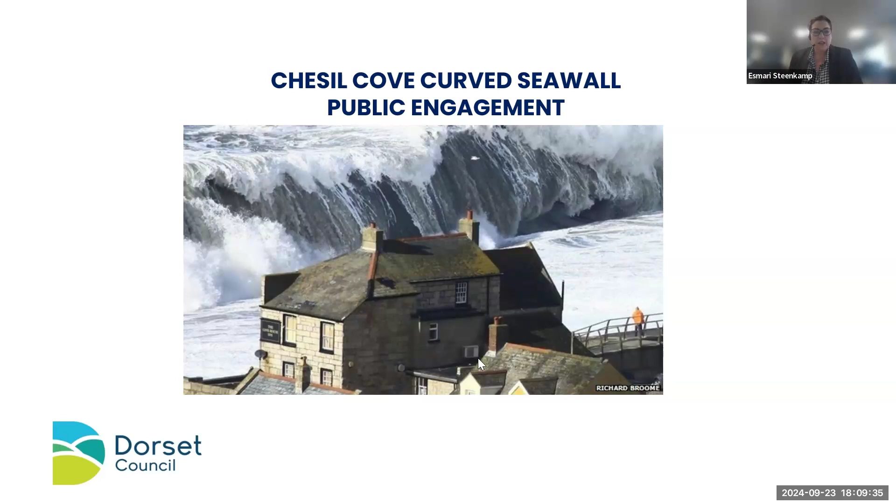Good evening. I'm the Coastal Risk Manager for Dorset Council. So as such, I head up the team of engineers who are responsible for the coastal defence and harbours infrastructure of the council. I just wanted to introduce you a little bit to the team and give some background for the project. So I'm the manager of the coastal risk team.

Ian Fitz, who is a project engineer in my team, has been tasked with this project. Now I give him support and steer on this project. Then we have Jacobs, who is our consultant on the project, and they bring their specialist knowledge to it. And Ross Fitzgerald is here tonight with us to discuss more of the technical detail.

So there are members of the core project team here tonight, but I just need to note that there are almost a dozen other people that work behind the scenes and are involved in the project, and they are mostly from scientific, environmental, planning and engineering backgrounds, and they all contribute to this project from their perspective, specialist fields and knowledge. So Ross is going to get into the meat and bones of the project after this, but I just wanted to give some context to everybody here tonight on where this project is and where it is coming from. So Nikki, if you can just give the next slide, thank you.

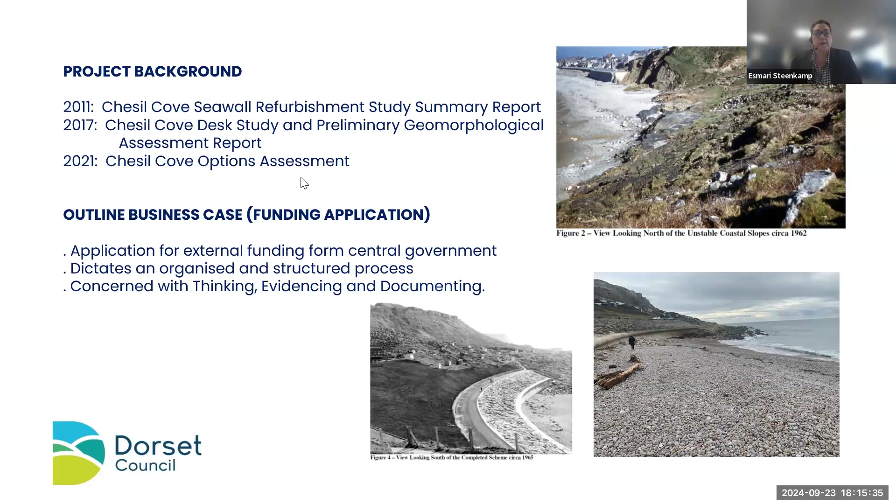and statutory consultees. The project, therefore, as it stands here tonight, is in a conceptual stage whereby we propose an engineering solution, and that solution must then pass a number of considerations of environmental, planning and engineering nature. Nikki, the next slide, please.

So I just wanted to give a bit of a strategic context to the project. There is the National Shoreline Management Plan, and for this section of the coast, it is a hold the line policy. So that enables us to actively intervene when it is necessary. We're also busy with the flood and coastal erosion risk management strategy that covers Portland, Underhill to Wyke Regis, of which this location forms part. And then we've got the West Dorset and Weymouth and Portland local plan of 2015.

Now, there is a specific key strategic objective in that plan that I would like to highlight to the audience here. And it reads, protect and enhance the outstanding natural and built environment, including its landscape, biodiversity and geodiversity, and the local distinctiveness of places within the area. This will be the overriding objective in those areas of the plan which are particularly sensitive to change. And this is, in my view, very applicable to this location and this project that we are busy with.

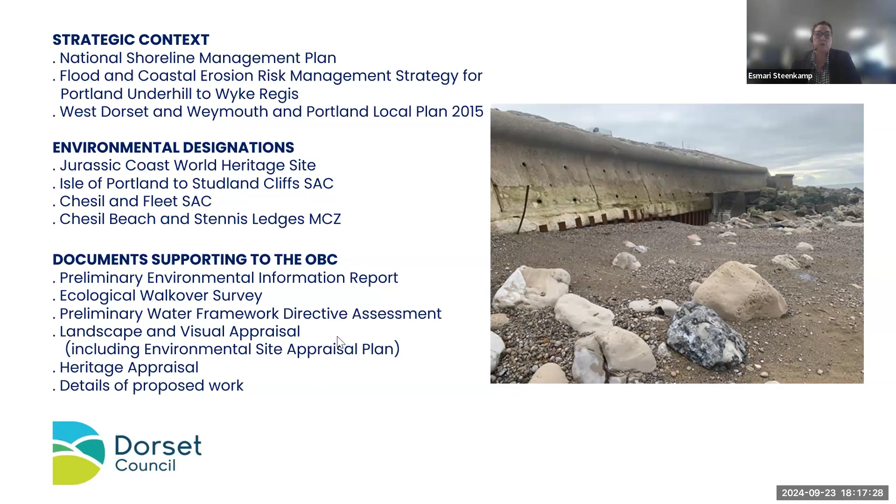There's a number of environmental designations at that location, and that gives rise to key areas of concern that need to be addressed. Therefore, with our business case that is submitted, there will also be supporting documentation that will address these key areas for consideration, and those documents are noted there in the presentation. So that's your preliminary environmental information report, ecological walkover survey, preliminary water framework directive assessment, landscape and visual appraisal, including the environmental site appraisal plan, heritage appraisal, and then details of the proposed work. So Nikki, if you can just get me the last slide, please.

So the project going forward, we are hoping to finalize this document by the end of this year, after which it has to be reviewed by the cabinet and approved, because the cabinet has to put forward funds towards the project. After that, we will submit it to the EA for approval, which will then unlock the funding that we wish to unlock for this project. Then planning and detailed design will follow in June 2025, and hopefully construction in the autumn or winter 26-27.

I think it's just important to note at this stage as well that the planning and design stage will come with its own rounds of engagements. There are many licences and approvals that need to be obtained before we can go do anything. And that includes also a public engagement process under which we will put the designs forward to the public for input. And this project, like any other development in Dorset, will go through the regular planning application process of the council. So that is where we are at the minute. And I will hand over to Ross now to give you the technical information of the project. Thank you very much, everybody.

Thanks, Esmari, and thank you everyone for having me along. And hello, let me just share my screen now. Bear with me one moment. This one here.

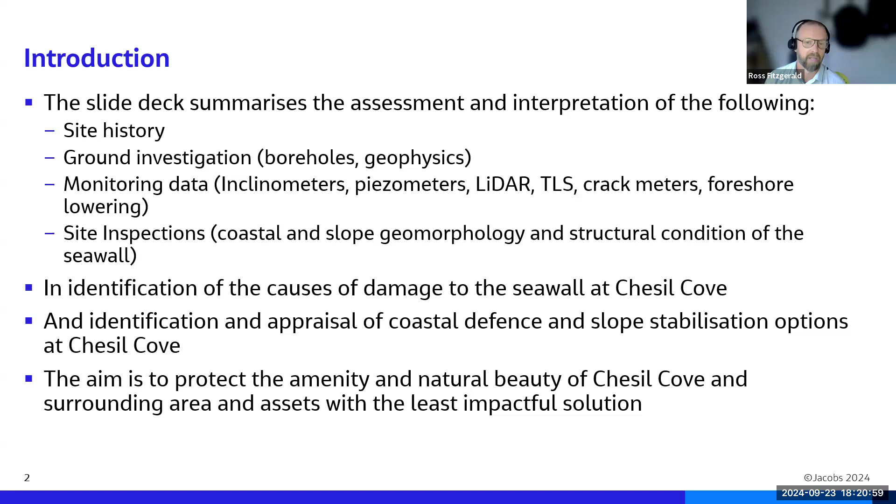We're also going to look at coastal defence and slope stabilisation options at Chesil Cove for the future. And I think, as Esme said, the aim is to protect the natural beauty and the amenity of the site and impact things as little as possible.

Over the next 100 years, this debris was gradually eroded back to the coastline by about the late 1950s. And at this point, coastal erosion started again of the actual slope itself. And this kick-started a lot of debris slides and mudslides and things. And that's the reason why the seawall was put in the first place.

So the cause of the 1857 slide was loss of toe weight. So as the coast erodes, you lose the force that resists the landslide because the weight at the back of the slope starts winning. So although the seawall isn't designed to stabilize the slope, it's a coastal defense structure, it's vitally important in preventing deep-seated landslides and shallow landslides. So this is a natural and cyclic process that goes on.

Okay, next is just a few of Stuart Morris's photos from around the time of the seawall construction. So thank you to Stuart for providing these. The one at the top and the one at the bottom left show the slope. So here we can see mudslides and compression ridges and tension cracks in the slope before the seawall was put in place, which illustrates the point I was just making.

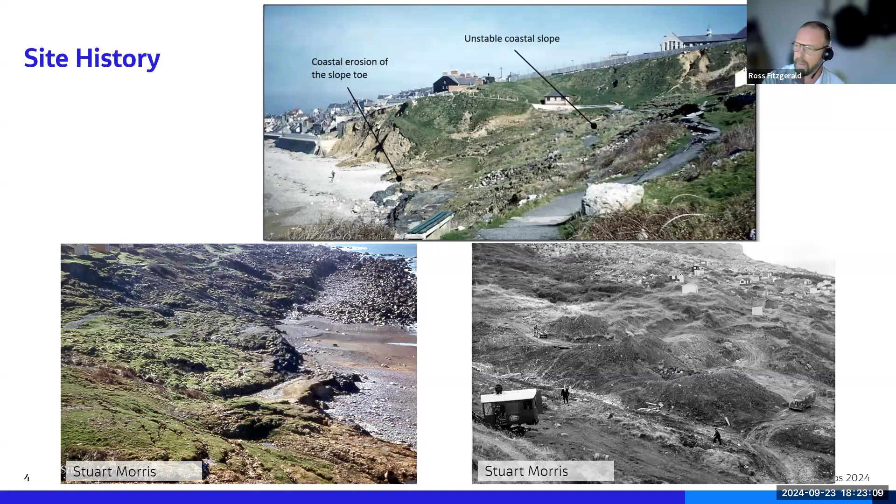And the more of this material that is lost to coastal erosion, the more you destabilize the wider landslide system that goes all the way up to the headscarp, which is the top of those mining dumps, sort of piles of rock. The bottom right image, we can see a haul road and a digger at work when the seawall was being constructed.

But what happens when the beach is offshore? The clay underneath gets worn away. And as the clay gets worn away, the seawall, which wasn't designed to have the clay being worn away, loses support because the seawall's foundations are in this clay.

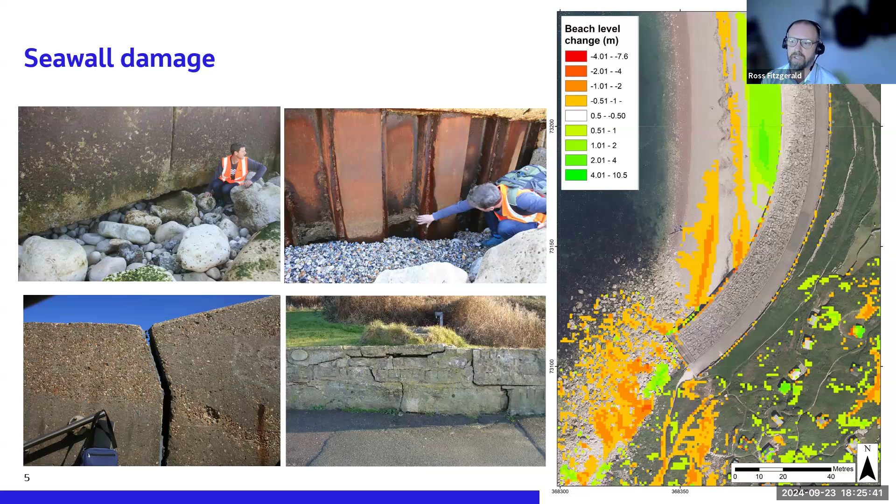So the seawall is still robust, but it just needs a bit of help to see out the next 100 years, and that's a big point. So when we do these sorts of projects, we have to consider the next 100 years. So bear that in mind as we go forwards.

So last one here, I'm just going to get the pointer. Has that worked? No, it hasn't. Laser pointer. Here we go.

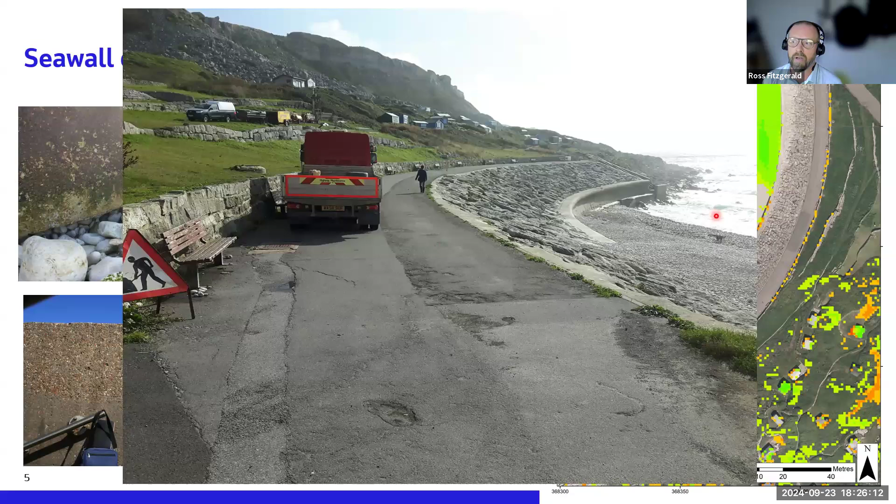So if you follow the rim of the rock apron here, which has been repaired a couple of times, you'll see that the promenade undulates. And the reason that it is settling is because material has been lost from below here, probably out from under the seawall through the piles. And that could be a really big problem because you're being eroded from behind, essentially.

Okay. Next, this is the augmentation works at the southern end of the seawall. There's no foundations, but it was sat on the clay. Basically, this is all completely eroded away now. And I know Ian's been measuring this in recent years. We've actually stopped measuring it because there's nothing to measure anymore. There's no clay left there at all. So this is a problem, and it has left the stairs and things, what we term the augmentation works, actually hanging off of the structure, which isn't good.

Okay, so next, this slide makes the point that, although the seawall was excellently designed and built, we weren't able to predict in the 60s that the coast was going to erode and leave the southern end of the seawall proud of the alignment of the beach, so sort of unprotected. So this is really the problem area here, where we're seeing that the structure is slowly falling forwards, not falling, that's over-egging it, sort of slowly rotating forward because of this loss of support here.

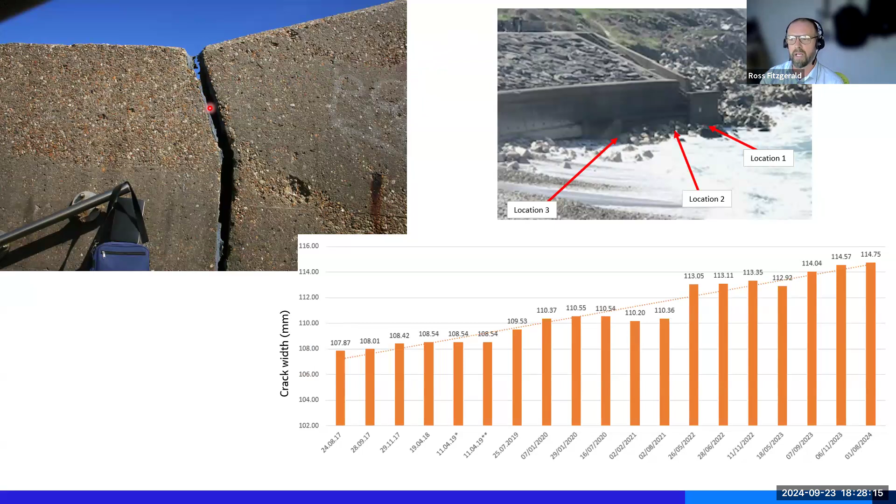It was originally thought, and the reason I was involved, because I deal with landslides a lot, was that there was a landslide behind it that was pushing it over, but this isn't actually the case. So those cracks I showed you on this wing wall here, if the earth pressure was coming from upslope, these wouldn't open up, they'd be compressed together. So it's actually the fact that the front of the seawall, the seaward facing bit, is losing support, that it's slowly falling over.

Okay, so my structural colleagues did a structural report on the seawall, and essentially, in layman's terms, because that's how I need to view it, because I'm not a structural engineer, the southern end here is slowly rotating forward because of loss of support. The northern end, all of the master joints between the wave return walls, so these are the big chunky bits of concrete along the front, they're actually in compression because the shallow failures are pushing into it. So essentially there's torsion being applied to the seawall.

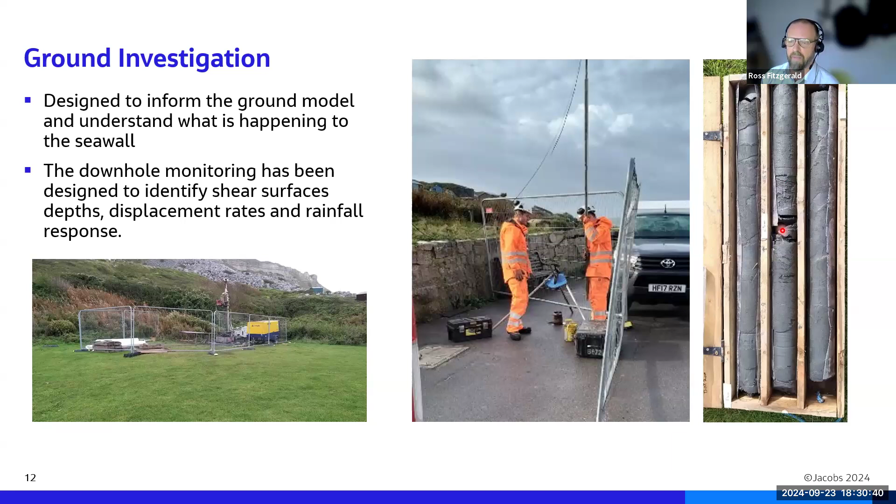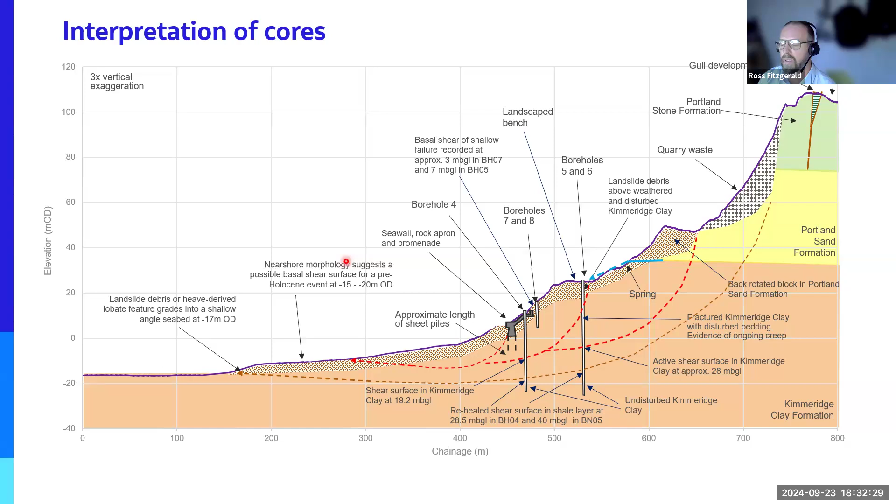There's another dotted line here at depth that we found, and that is probably from an earlier ancient landslide when sea levels were lower, and that's nothing to worry about at all. Oh, none of them are anything to worry about, as long as we keep the seawall in place.

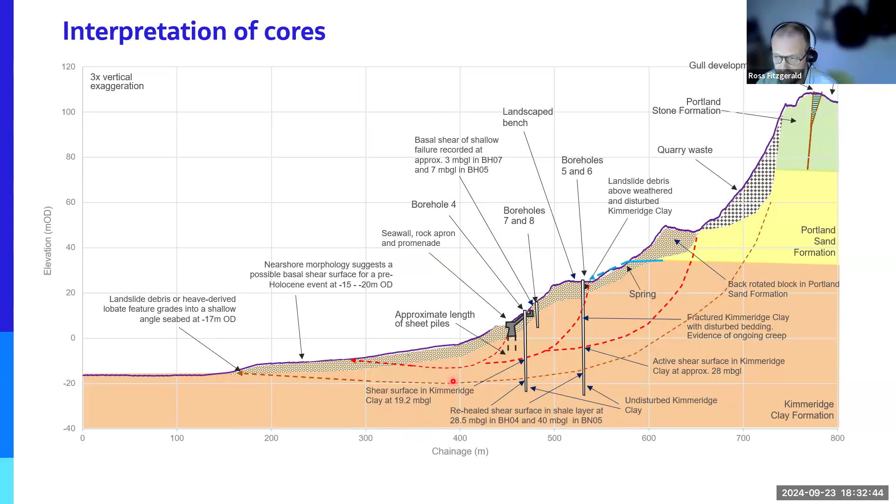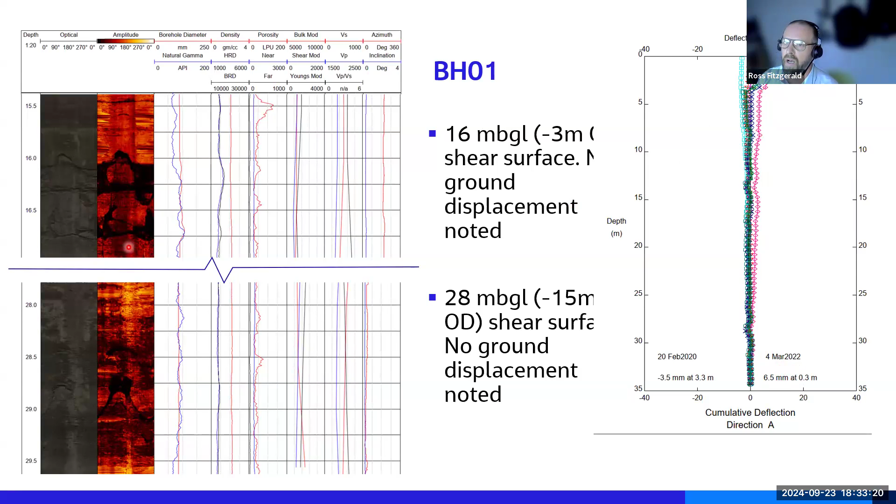So lots of things here, but I've just shown some pictures of some of the geophysics which look down the hole and find these disturbed areas where the ground is moving. And this is a shallow one in borehole one. So this is in the seawall. This shows that over just over 2 years, the seawall has moved just over a centimetre at the southern end towards the sea, which isn't alarming, but it's obviously not great. And it's at the depth where we're seeing the shear in the ground, and also at the depth we're seeing it in the cores. So these lines of evidence stack up to prove the ground model.

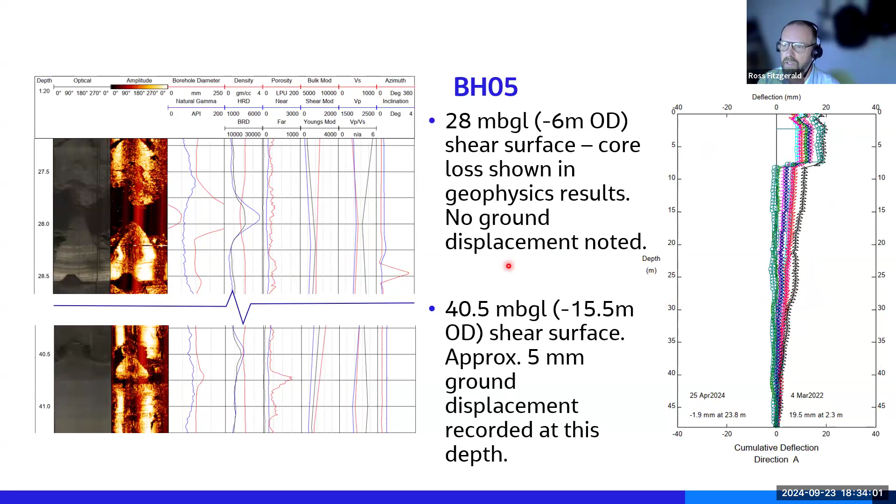We don't want to lose any of the coast to encourage this to happen. And again, it's backed up in the logs and things. I won't labour through all of that. This is a summary, schematic summary of the direction and rate of movement.

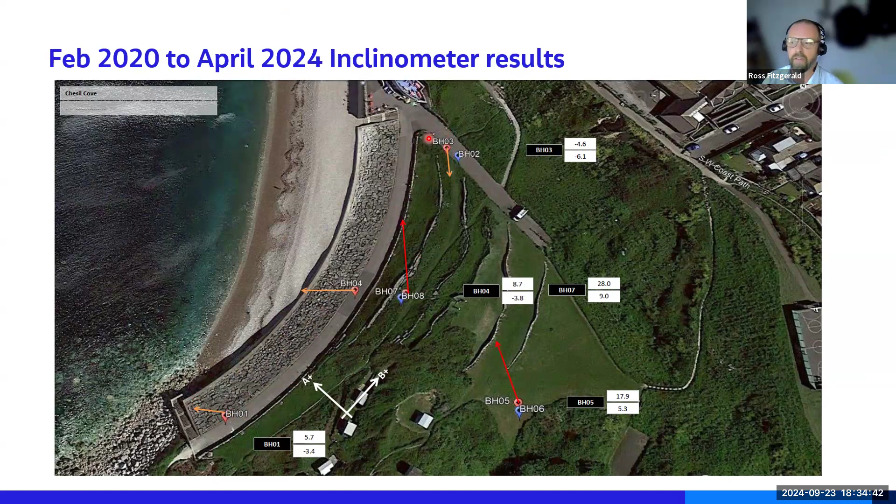And it really backs up the structural report in the fact that there is earth pressure being directed into and behind the seawall. And the seawall itself, the southern half, is moving forwards towards the sea, which we definitely don't want. And this end, although we don't have a borehole in the actual seawall, that doesn't seem to be happening. So there's this kind of twist happening to the seawall. And again, all of the lines of evidence stack up. They all make sense in context of one another.

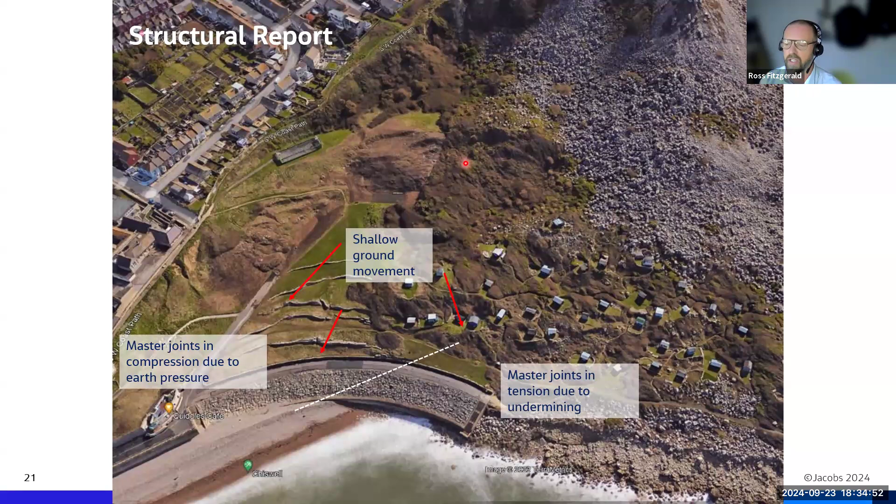I think I've had this one already, haven't I? So this is just explaining the different forces on the seawall at each end. This is the shallow earth pressure. So here you've got 3 to 4 meters of shallow movement, and this is what's causing the damage at the rear of the seawall.

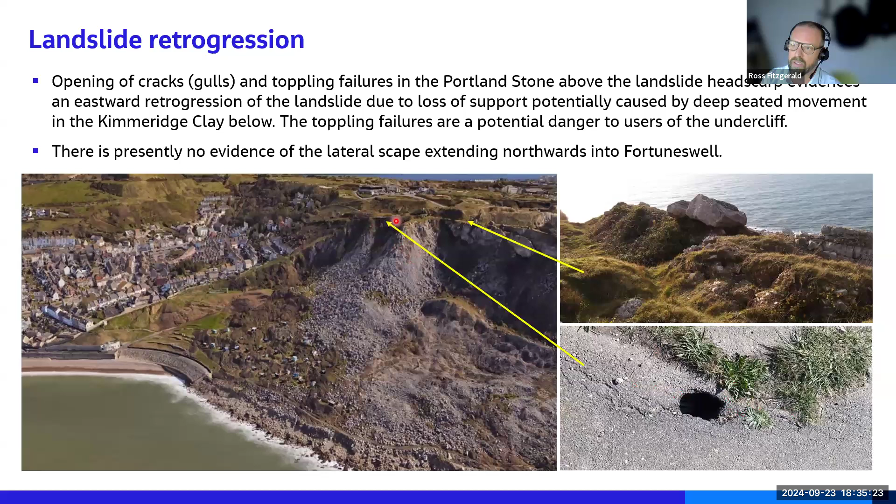Right, the next thing, and again, not being alarmist at this, but this is potentially what could happen. So what we noticed a few years ago is that you were getting cracks opening up and gulls opening up behind, in between the crest of the slope and the road. That's developed, so there's now quite extensive tension cracking and quite big voids opening up and things.

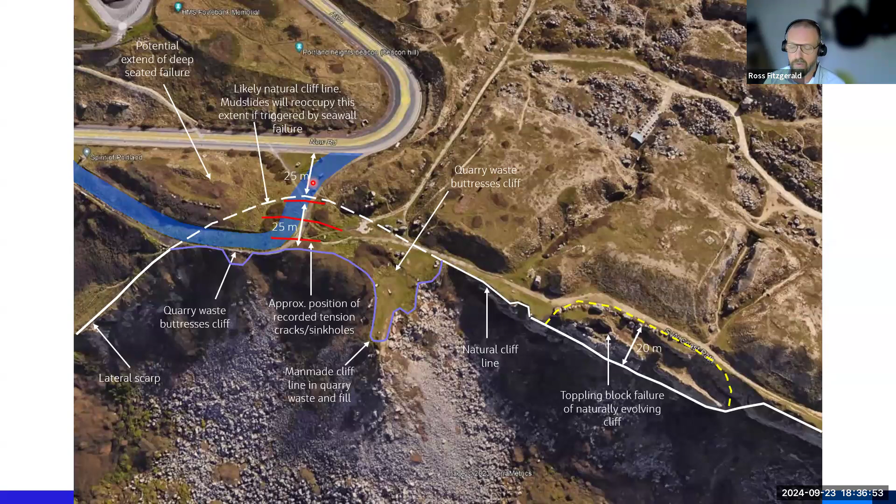And bear in mind, we're looking at 100 years. We have to base what we're doing, our business case, on 100 years. This 50 meters total to where the road is, it isn't looking so healthy. So really we are reliant on the seawall to protect access. Again, I don't want to be alarmist. This sort of thing isn't going to unravel quickly, but we have to consider the 100 years.

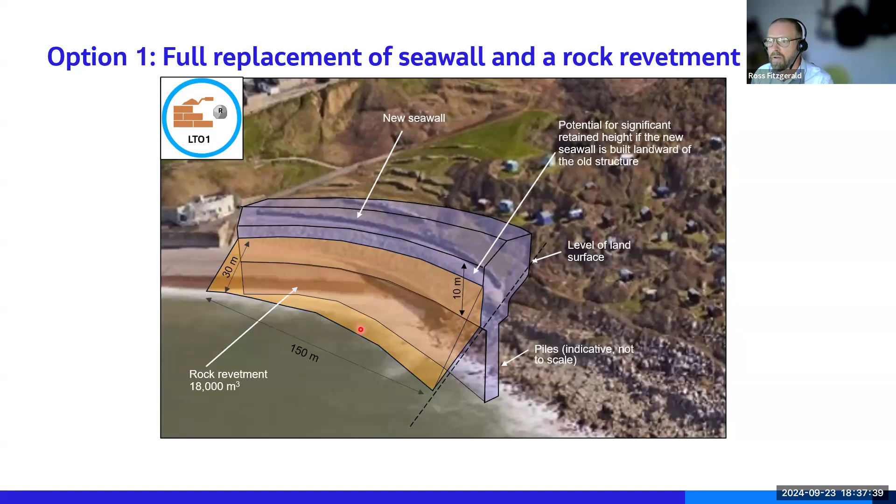It would have massive implications and disruption. It also triggers all sorts of environmental and heritage problems. So it's really, really not an avenue we want to go down. There's a partial replacement, which essentially has all the same problems.

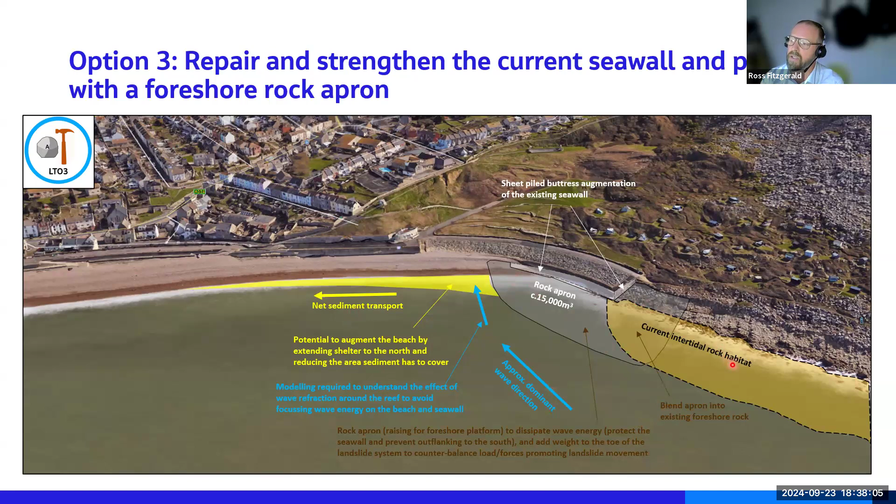It's really very disruptive. We then have a series of options where we propose to repair the seawall and then protect it with some rock, so we get a long life out of it, far longer than the original design life. So we've got a rock apron option, which kind of blends into the natural rock habitat. We've got a terminal groin and reef option.

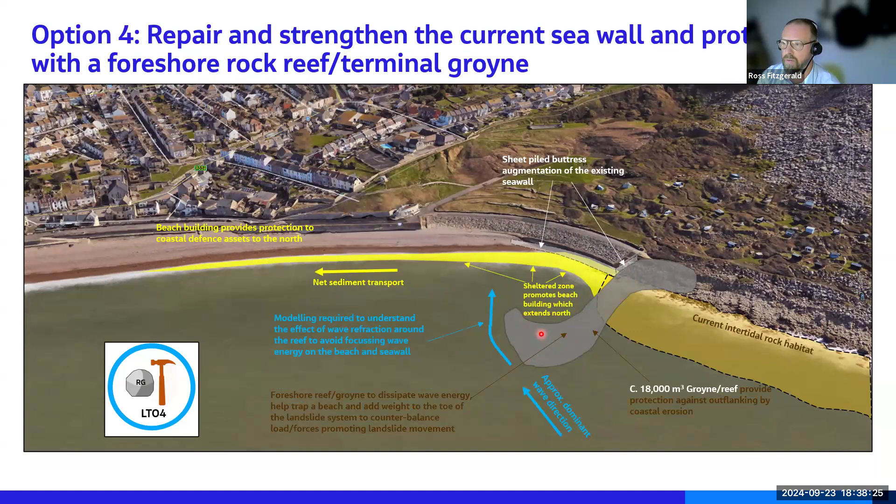The problem with this is that the water's so deep here that you need an enormous amount of rock. So it's very expensive, and it triggers, working in the nearshore here, all sorts of environmental problems. So that wasn't favoured. We've got a rock revetment and a repair. So this is the kind of thing that's on the table. This is where the business case has gone. Something a lot more modest, but well designed to protect the coast.

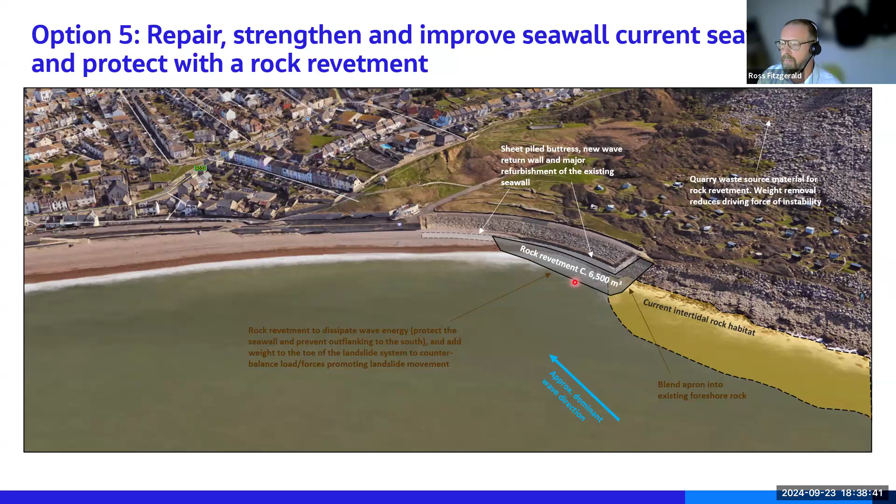You've got an offshore reef option. This is similar to the terminal groyne and reef. It triggers all sorts of problems environmentally and with cost. And we've gone through, as Esme said, a process of assessing all of these, the pros and cons of all of these. And here's a list of just some of the things.

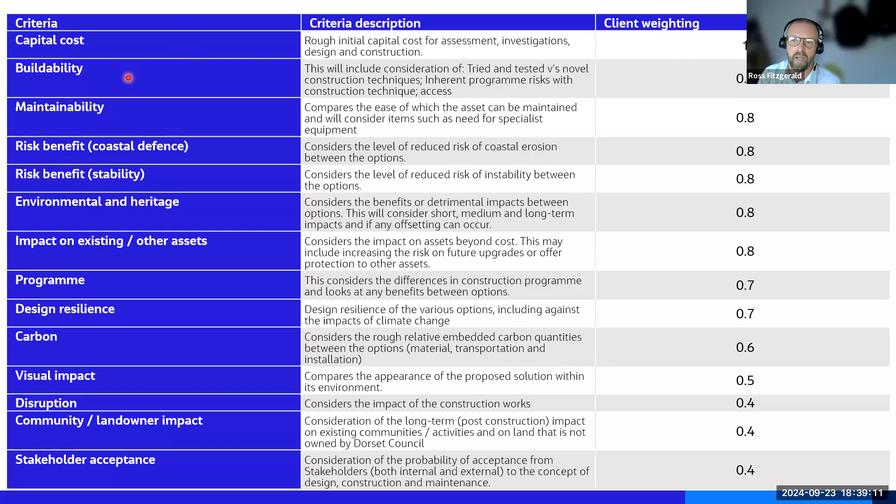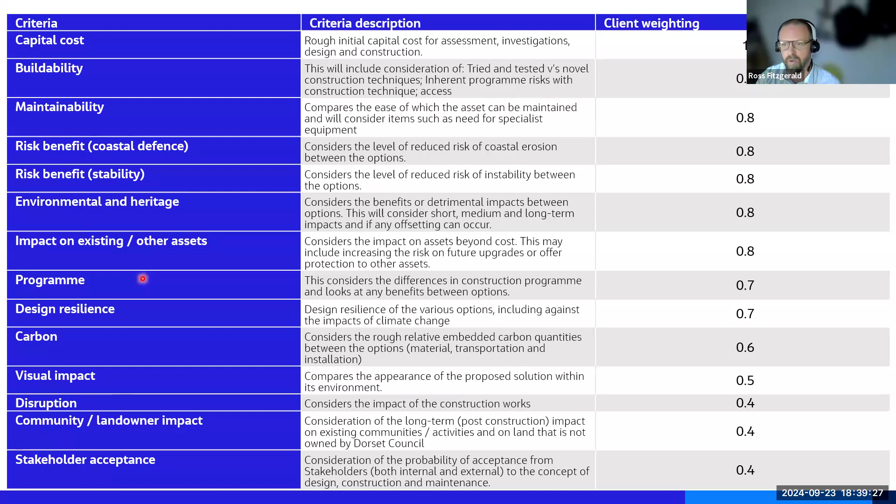So you've got, how much does it cost? Can you build it? Can you maintain it? How much does it improve coastal defence? How much does it improve the stability of the whole slope? Because remember, we're trying to preserve the amenity of the whole slope and the assets adjacent. You've got, does it trigger environmental and heritage issues, etc. I won't labour through these because you can see the slides, but there's a long list of things that we have to consider.

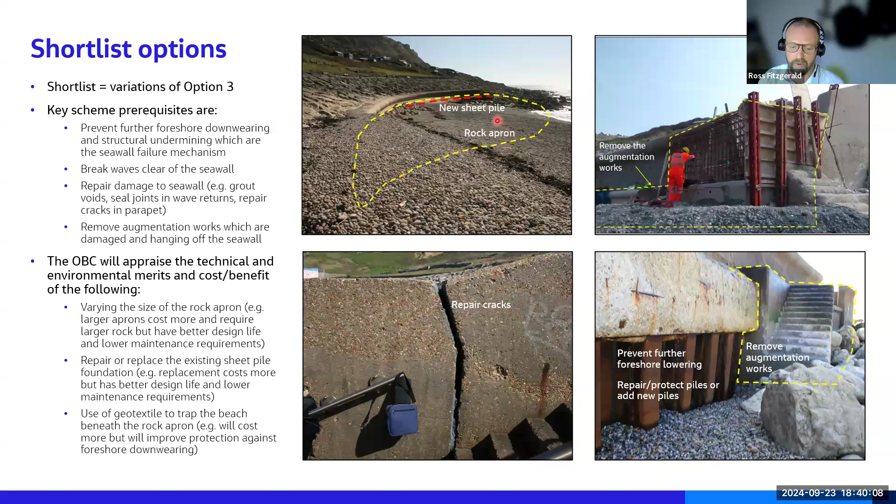So really, we get back to the preferred option. I'm going to start top right. We hope to remove, this is not signed and sealed, the augmentation works to stop them pulling the structure over. We're going to put in a new sheet pile in front of the current one to protect it from coastal erosion, and so that the material under the seawall cannot escape. We're going to repair the cracks. We're going to repair any other concrete bits, and we're going to put a rock apron or revetment, it's just a different name, in front of it.